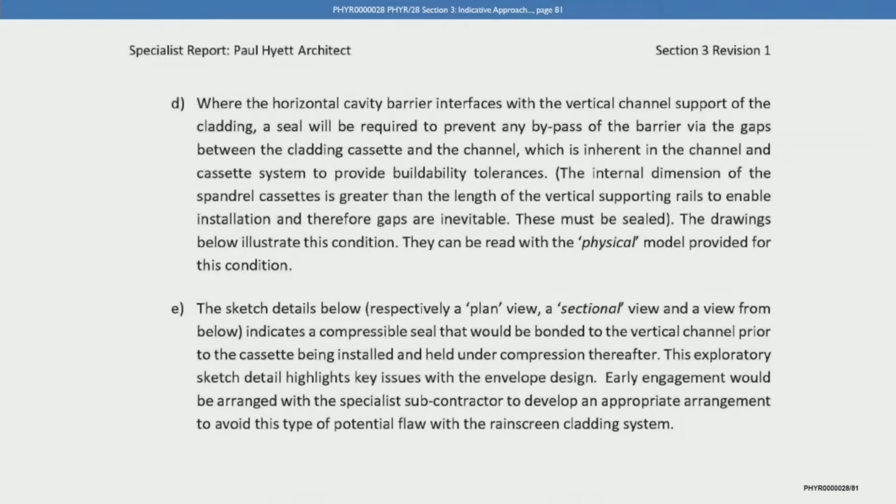The drawings below illustrate this condition. They can be read with the physical model provided for this condition. Now, your solution to the problem you've identified is to place a seal in those gaps, isn't it? Correct. And if we look at figure 3.44 on page 82, the next page over, we can see here the seals highlighted in green. Am I right? Correct, yes.

So is it your proposal here to place intumescent strips bonded and mechanically fixed to the vertical channel? That's your solution, I think. The exact way of dealing with fixing them would be a matter of some discussion, but one way would be to fix them onto the outside sides of the channel, yes. And is the idea that these would expand as cavity barriers would expand in the event of a fire, filling that gap? Correct.

Do you think that approach would resolve this problem, namely the problem of the gap within the U-shaped rail we saw, which is caused as a result of needing to cut the cavity barriers around the cladding rail? I believe it would. Could we go back to the previous drawing?

Yes, if that's on page 81. We can go to page 81, I think, which is the previous drawing. Is that figure 3.42? Yes.

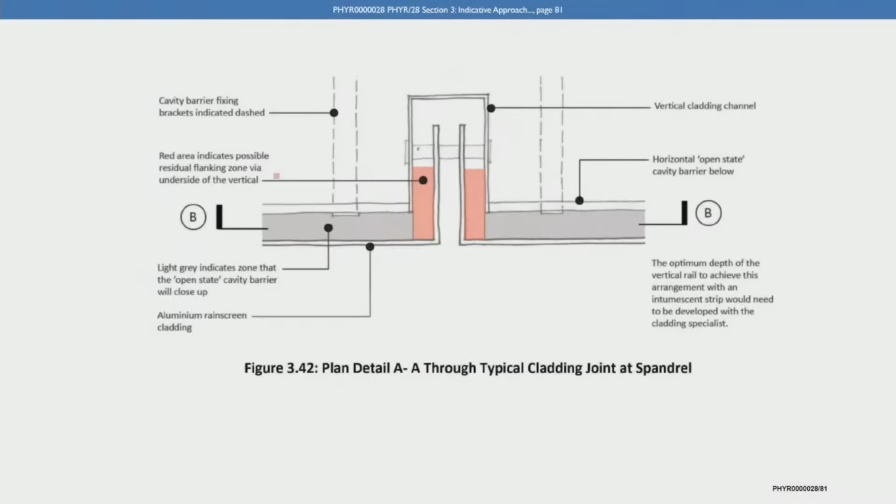Why I wanted to show that drawing is that there is a discussion to be had about where is the outside of the building. If we follow the note: aluminium rain screen cladding, there's a black dot that shows the outside face of the aluminium, but that returns into the channel and stops. It sits across the toggle.

There is another aluminium cladding panel coming in as well. The tray is coming in there. So the outside of the building is the outside, the bottom horizontal line, but then it returns into the channel.

And I think that the outside of the building actually goes right into the channel face, the inside part of the channel. When you say the outside of the building, you actually mean the exterior face of the inturn or upturn of the aluminium cladding?

I mean the external face of the building returns with the tray, for want of a better term, into the channel. And it is essential that the horizontal cavity barrier closes that gap.

It's a very difficult piece to gather in 3 dimensions. It'll be challenging for architects to get this, and it'll be challenging for everybody else. But if you don't have that sealed, fire underneath the cavity barrier can break into the channel and then up inside the channel and back into the next concealed space - that's the space that forms the cavity above the cavity barrier.

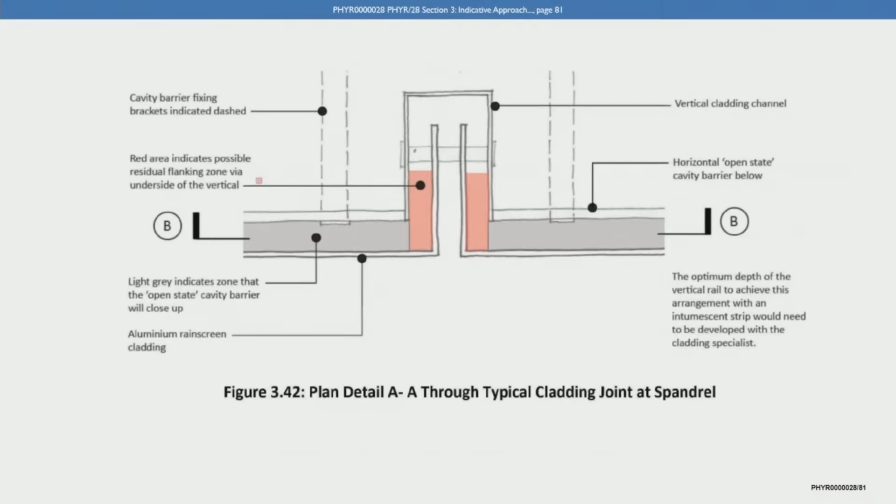Is that clear? This is what that is intended to address. But it is to me. So long as my question was clear to you, I think that was what matters, and I think you've answered it.

What is shown pink would have to go the entire height of the tray. So the return edge of the tray would have to have that seal all the way up it, so that at no point can any fire that's got into the part of the channel where the toggle is break back out around the edge of the channel and into the cavity above. So that would have to go the whole way up.

Can we then go back to page 81? I'm sorry, page 82. Yes. And look at figure 3.44.

If you look at that there, you can see, as I pointed out to you, the green square with the arrow pointing to intumescent strip bonded and mechanically fixed to vertical channel. Do you see that? Yes.

How would those seals or intumescent strips be bonded to the rail? Well, they can be glued to rail, fixed in that fashion, because they've just got to stay there. Once there's a fire, they would expand, and by virtue of having expanded, they would fill the gap and stay there.

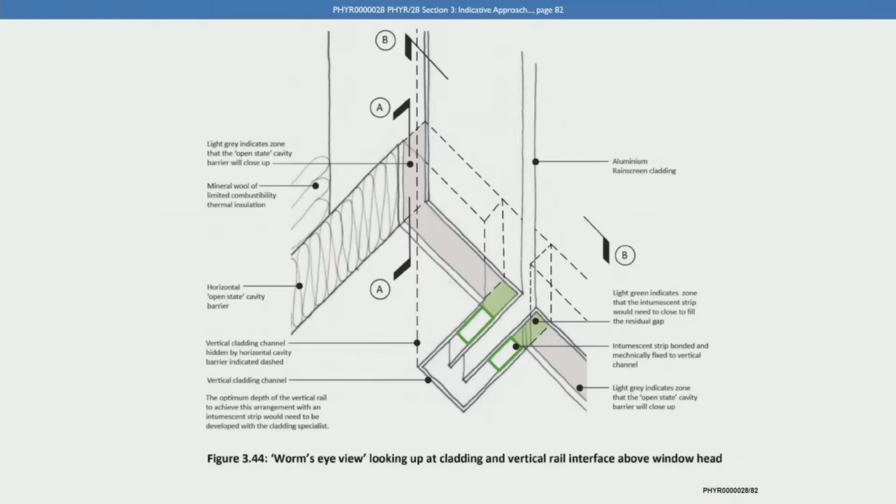Now, you can see on this diagram, at 3.44, that still leaves a gap in the vertical channel at the very back of the rail, doesn't it? Yes, and everybody's got the idea that this is a worm's eye view - you're looking up at it from underneath. Yes, absolutely. So this is the opposite of a plan, I think.

Well, it's a sort of axonometric. We do two types of these drawings. One is looking down, because it's a perspective. The other is looking up from underneath. This is actually looking up from underneath. It requires quite a bit of imagination to do this.

Right, well, I think I've got enough imagination to pose the question, and that is, looking up at it from my position as a worm, there is a white area still to the, as it were, southeast of the green oblong. If I may say so, well done, that is correct.

Right. Yes, it's probably easier to see on figure 3.42, on page 81, if we go to that, because I can ask the question better by reference to that. Yes, so it is. You can still see the white part at the top of the U, which you've identified as vertical cladding channel. That gap remains, doesn't it, notwithstanding your proposal? That's correct.

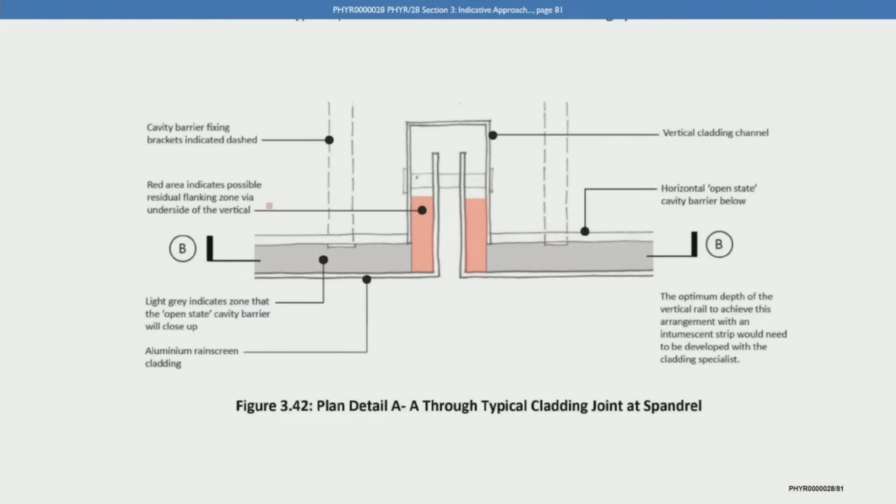Why would it be acceptable to leave that gap unfilled? Because I made the point a few moments ago about the distinction of what is the outside and the inside of the building. I think the outside of the cladding is the slot between the two edges of the cassette as it goes into the channel. I think that's arguably still outside the building.

But either way, the pink there would go from top to bottom, and therefore it would seal the inside of the cavity inside the rain screen, above and below the cavity barrier, from that vertical space within the channel. So effectively, the inside would have been sealed from the outside.

Yes, I see. It's a challenging thing to grasp, I'm afraid. No, you've explained it very clearly, and if you haven't, no doubt I shall be asked to clarify it further with you. But just looking at that and thinking about it, that's a bespoke piece, isn't it? The pink. Yes, yes. Is that something that could be engineered on site, or would that need to be considered carefully by the architect long before this got anywhere?

I think it would want to be thought about - well, I'm going to qualify that if I may in a moment. But I think ideally it should be thought about early, because the overall arrangement has to be signed off as workable, and unless you can deal with this, then the problem may not be solvable. So I would wish to see it solved early.

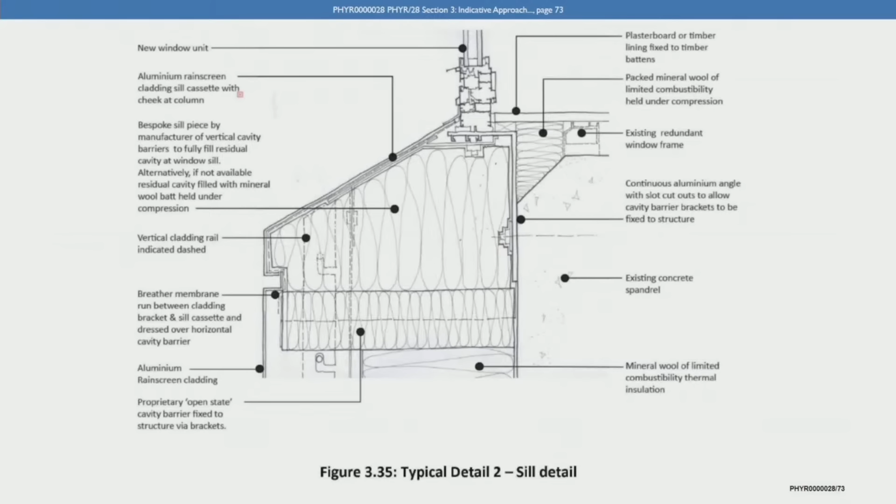We call it the thermal line. The insulation outside the building needed to be continuous through to the windows. If that wasn't achieved, there'd be what we call a cold bridge, a gap. So there's all sorts of problems with that. Apart from the loss of insulation, there's condensation, all sorts of problems.

You may remember, when I was explaining the model, I believe I said that if the windows had been left in their original position, the insulation would have had to have been brought down the spandrel panel - taking the section through the building, down the spandrel panel over the window, and then it would have had to have turned and gone under the concrete slab until it reached the window. That would have been a depth of something like that.

Likewise with the sill, it would have had to have come up and then crossed to meet the window frame. That would have reduced the depth of the windows. It would have had a major - I won't say adverse because that's subjective - but it would have had a major impact on the appearance of the building. It would have reduced the view from inside. At the jambs, the same thing would have had to have happened. So I think it would have been difficult to deal with, and therefore I believe most, if not every architect, would conclude that to overclad the building, the windows would move out.

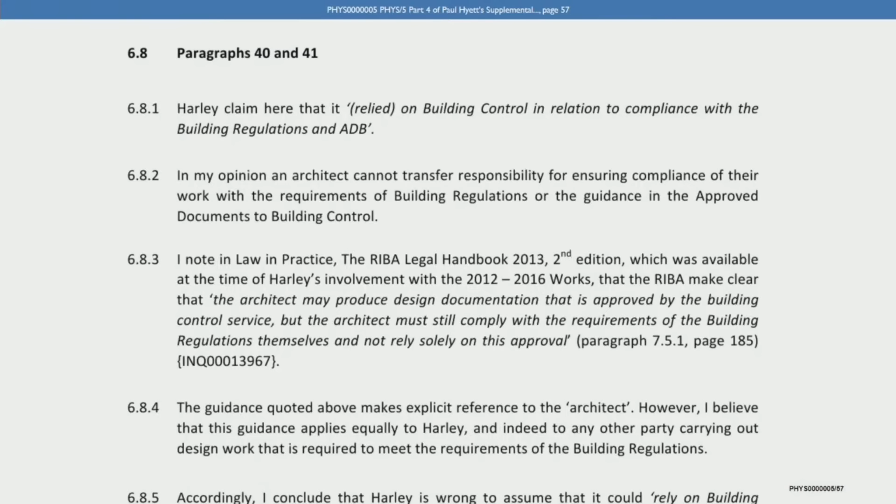Can we take it that it's, in your view, not reasonable for an architect to rely on building control as the only check on whether a design complies with the building regulations? That is my view, yes. And that a reasonably prudent, reasonably competent architect must check that for himself, whatever the building control body decides to do. That is correct, yes.

In relation to the full plans application, you say in your report that it's accepted practice that a full plans application should be submitted with a set of general arrangement drawings and typical construction details. I can show you that if you want. No, I remember it - just for reference purposes, it's paragraph 5.1.8 on page 5. But you remember that's what you say.

In your experience, would general arrangement drawings include basic details such as the type of cladding proposed? The generic type, yes, not necessarily the manufacturer, but the generic type. When you say generic type, could you be a bit more specific? ACM, zinc, terracotta, whatever it's going to be.

Would general arrangement drawings typically include the insulation proposed? Same answer, generically, yes. So what would that be in the case of FR 5000 or RS 5000? Well, it could be mineral wool if it was not going to be that. Alternatively, I suppose it might be PIR, or it might just simply specify the name. What about the cavity barrier strategy - would general arrangement drawings include basic details about the cavity barrier strategy?

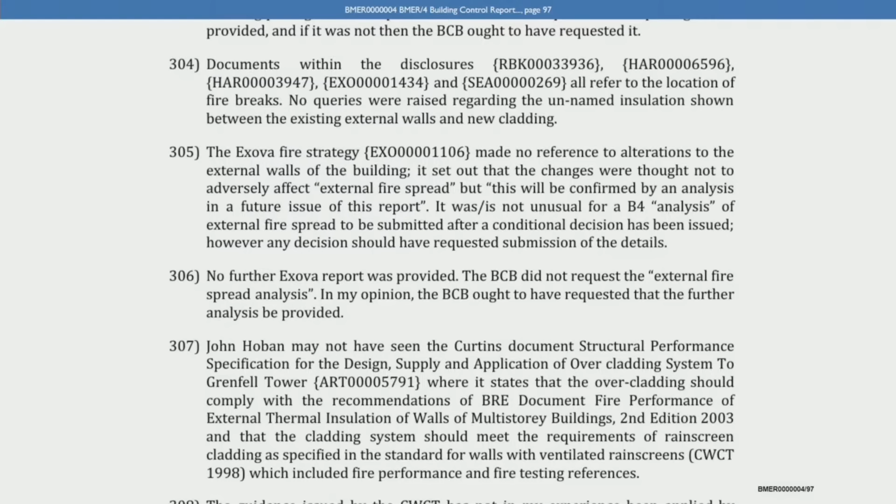However, any decision should have requested submission of the details. Now, this would be the conditional rejection or approval of the full plans application. Do you agree with her opinion from an architect's perspective? Yes, I don't have a problem with that, no.

Now, you say in your report, and just for the transcript this is at 4.1.33 of your report at PHYR 5029, page 12, you say it is very important to note that the principal components, products, materials that make up the overcladding cannot be considered in isolation.

Now, is a consequence of your view, which I've just quoted to you, that a full analysis of the facade system for the purposes of compliance with B4 of the building regulations depended on the person doing the analysis having full details of the final materials decided upon for installation? Yeah, I think that follows, yes.

So that would include, and I'm inviting you to agree, the PIR insulation and the ACM panels with the PE core. Yes. Do you consider that a full analysis then couldn't be undertaken by Exova or any other fire safety engineer until the NBS specification had been finalised and provided in November 2013, or perhaps January 2014?

It could have been done in principle, but the finalisation of it, the finalisation of the fire safety report, would have been dependent on the finalisation of the proposals.

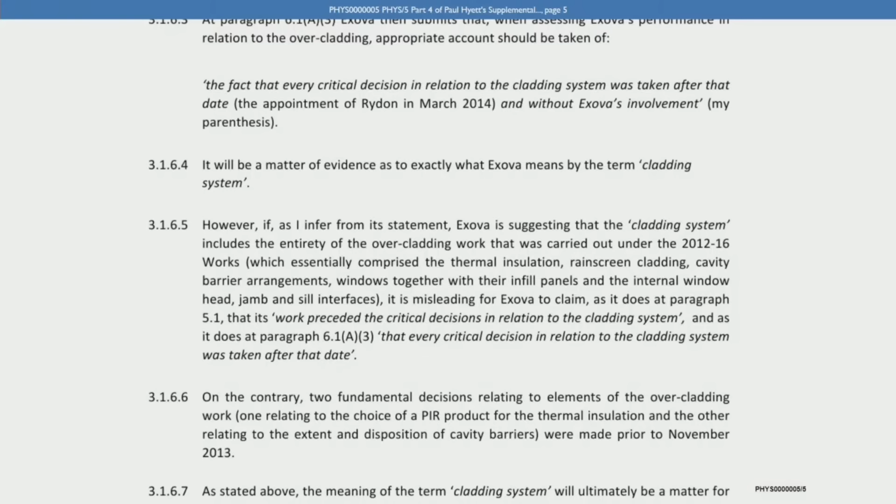Now, it's right, I think, that Celotex FR5000 was specified in H92 of the NBS specification, as we've seen. Studio E didn't provide Exova with a draft copy of the NBS specification. In those circumstances, Mr. Hyett, would you expect the reasonably competent architect to do so? Yes. Would you expect the reasonably competent architect to ask the specialist fire safety consultant expressly for advice in respect of the materials to be specified within the NBS specification?

Yes, the architect needs to be comfortable that overcladding is compliant. And I think you told us earlier that you would also expect that view to be sought from the specialist fire consultant in relation to the cavity barrier strategy at that stage. Yes. Or you would expect the architect to read off other advice provided by the specialist fire safety consultant when compiling the NBS. I think you'd make that point.

Correct, yes. Now, in September 2014, and indeed March 2015, Studio E did seek some advice from Exova in respect of the cavity barrier placement or location, and we've seen some of that before. Is your view that Studio E ought, as a reasonably competent architect, to have sought such advice earlier in the design process? Yes, absolutely. And indeed in respect of the cavity barrier strategy in its entirety? Yes. You clarified that before.

And on that, do you think that Studio E ought, acting as a reasonably competent architect, to have involved Exova in those decisions? Yes, they were. We're now pre-novation. The architect is the lead consultant responsible for... No, we're post-novation. Oh, sorry, I beg your pardon. September 2014, March 2015 is post-novation. Right. So, could you ask the question again?

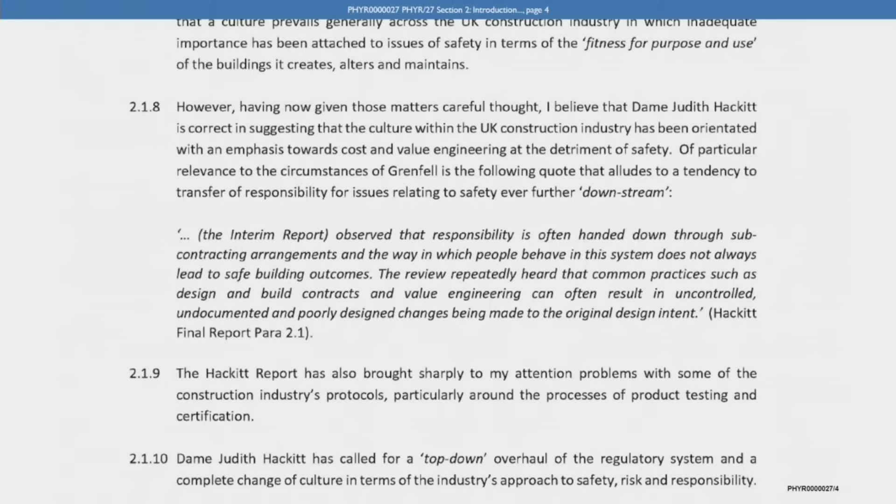Do you agree that this culture does not excuse the reasonably competent architect in the UK at the time of the Grenfell Tower project from considering the safety of the proposed changes brought about by a value engineering process? I do. And that it would be so in relation to whether the process related to drawings or to materials or products specified? Yes, correct.

Do you believe that the phrase value engineering had, by 2012, become a euphemism for cost cutting? I do. Do you agree that in a true value engineering process, the functionality of design would either be preserved for less cost or improved for the same cost as originally proposed? I'm sorry, Mr. Millett, I've got to be very careful with answers like the one I just gave. Could you restate the question about euphemism? Yes. Do you believe that the phrase value engineering had, by 2012, become a euphemism for cost cutting?

Difficult to make a generalization. Many design build contractors are highly competent and highly responsible and will interrogate a design with great effect and find cheaper but not worse. Less expensive is a better term, less expensive ways of doing something. That is value engineering, that's very useful. And I don't want to give an answer that would dismiss the good quality work of many good design build contractors.